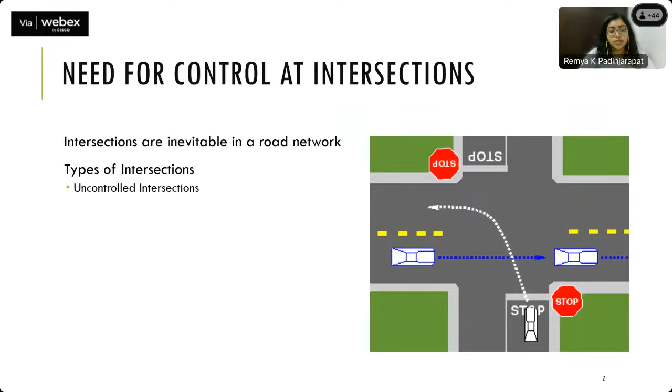The first is what we have intersections, and they are obviously an inevitable part of a road network. So there are various types of intersections: uncontrolled intersection, channelized intersections, rotaries, signalized intersection, and grade separated. Among them, signalized intersection is most popular in cities where there is a lot of city traffic and pedestrian traffic involved, because it works on the principle of time sharing, where different movements of traffic share the same space at different sections of time. So it's a very highly efficient system for city traffic.

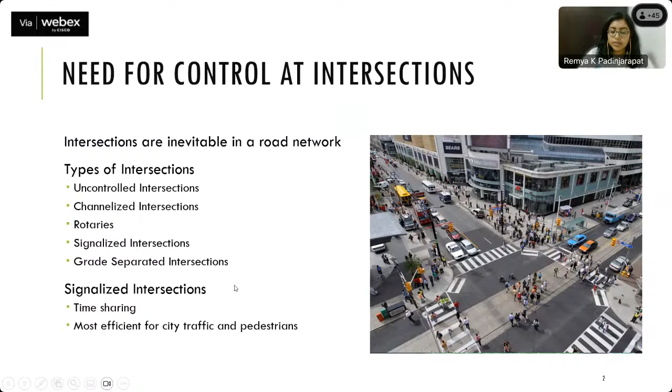So considering the traffic types, basically, you all will be very much aware, there are homogeneous as well as multi-class. Homogeneous is obviously similar types of vehicles, or the behavior of vehicles will be quite similar. They'll be lane following. But in multi-class traffic streams, there will be a lot more varieties of vehicles, because of which the behavior of vehicles is different, which results in a weak lane discipline. And specifically, these characteristics become very strong during queuing and queue discharge conditions, which is very much of importance when we are designing signalized intersections.

So again, coming to the basics, in an ideal condition, vehicles will align themselves in a very orderly manner, and during the green time, the discharge is seen such that there is a lag. Excuse me, I'll just change my pointer.

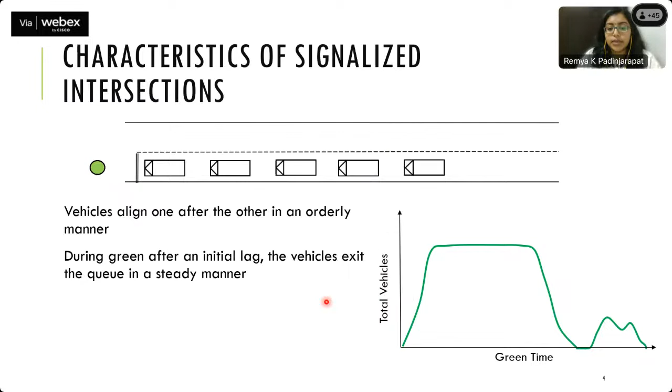Yes, so there will be a lag in the initial discharge, and once a point is reached where the vehicles will have a steady flow, and this is the maximum flow that is seen at the intersection, and it is called the saturation flow, which is of importance for us at this moment.

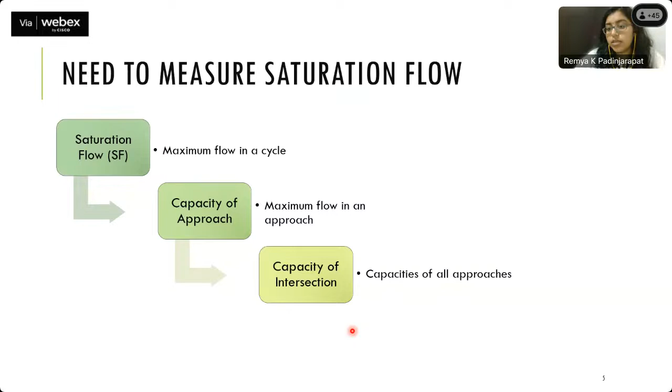So why do we need to measure saturation flow? It is the maximum flow in a cycle, which eventually translates to finding out the maximum flow that an approach can take in, and it is used again to find out the capacity of an intersection, which is the maximum flow among all the approaches, and again redistributed to find out the signal timings, which is proportionately divided based on the capacity of each approach.

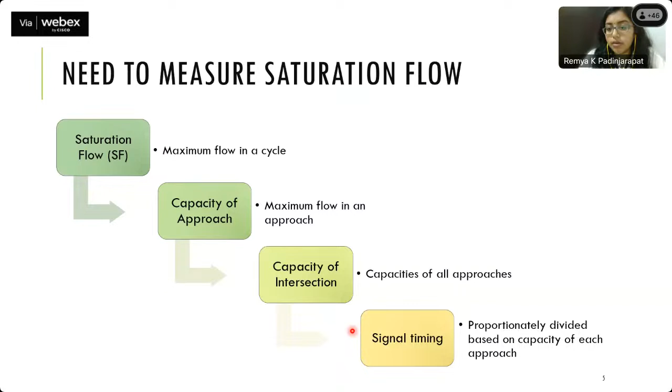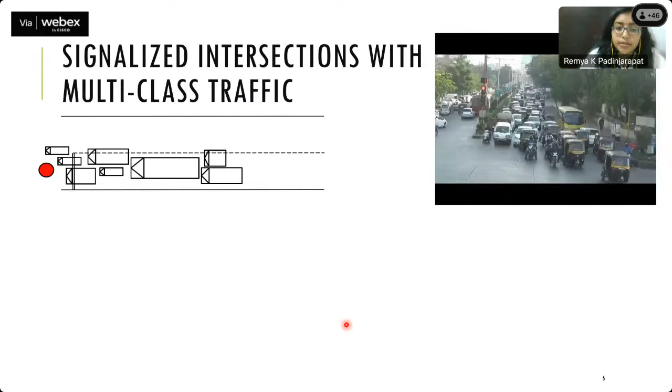But when it comes to multi-class traffic streams, this is a very vague representation of how queuing would generally take place in a multi-class stream, because the vehicles will tend to take up whatever gap is available and try to move ahead in the queue. So we observe a diamond-shaped queuing pattern here, and the vehicles tend to creep forward. Even though the queue might be standing, the vehicles might slowly move ahead, which is a phenomenon called headway compression.

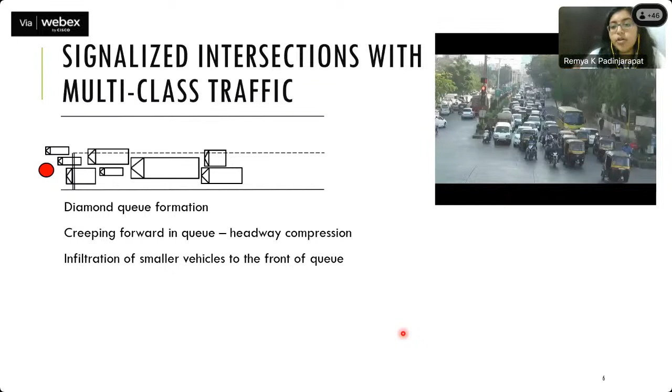And then of course there is the infiltration by smaller vehicles towards the front of the queue. The smaller vehicles just clog around in the front of the queue, and what we see during discharge is that there is no particular first in first out pattern. For example, you can see the two-wheelers here, they come from the extreme end and take their turns. Although they might not be the first vehicle in queue, they tend to leave the

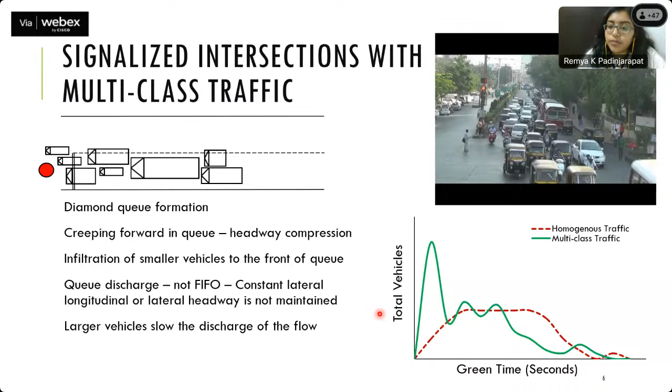queue earlier. So in short, these behaviors, and you can see that larger vehicles will always slow down the discharge of the other flows behind them. So because of which, instead of a steady pattern, what we observe is a very fluctuating discharge. So this is one of the problems that we are trying to address in this study.

So the question that remains is, where do we draw the line? Where do we draw the steady line, and how long does that go? Whether it starts at this time interval or the first interval, or does it start from here, and how far does it go? Does it stop at 10 seconds or 15 seconds or 20 seconds? So that is the question that we are trying to address here.

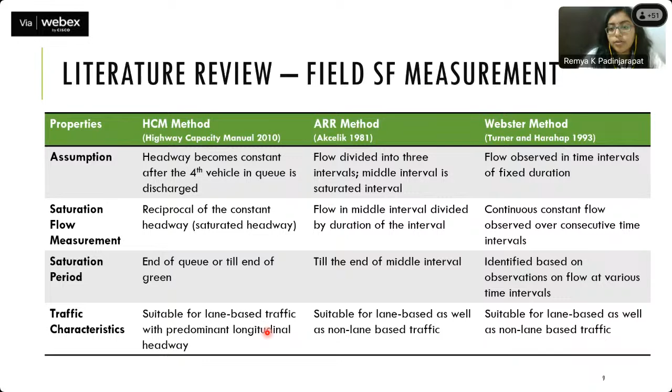As far as saturation flow estimation models are concerned, which is in the absence of flow data, more from a planning perspective, the general pattern is that there will be a base saturation flow model, and there will be adjustment factors. The base saturation flow model is usually the saturation flow that is seen in a base signalized intersection or base approach. So how do we define a base approach?

It's mostly described as without any disturbances from side friction due to parking, there is a proper pedestrian crosswalk, there is no bus stop. So there are these many factors, and there is the presence of an all-car condition and no other vehicle type. These are described as the base flow condition, and the adjustment factors will be the adjustment for each factor which is deviating from the base condition.

So base saturation flow for the Highway Capacity Manual uses the saturation headway, and it's a constant value for one lane. It is described as 1900 vehicles, and whatever changes from the base, of course there's a description of the base intersection in the Highway Capacity Manual, and whatever is deviating from that comes in as an adjustment factor.

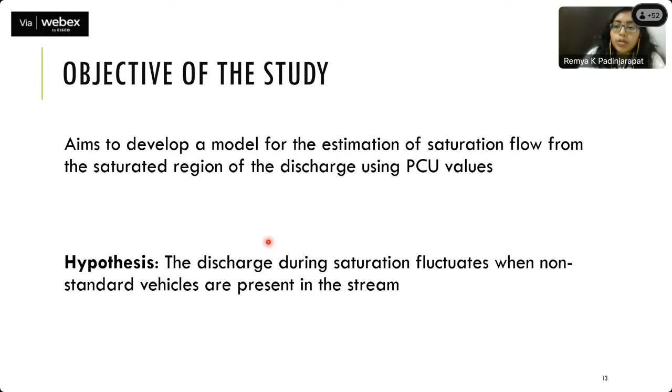So the fundamentals of the model are developed based on this hypothesis. Suppose on the x-axis is the green time, and the y-axis is the number of vehicles. We can see that the flow is fluctuating throughout the green time. So an expected saturation flow, shown in the red line, would be such that the PCU values bring the flow of vehicles towards this saturated flow line.

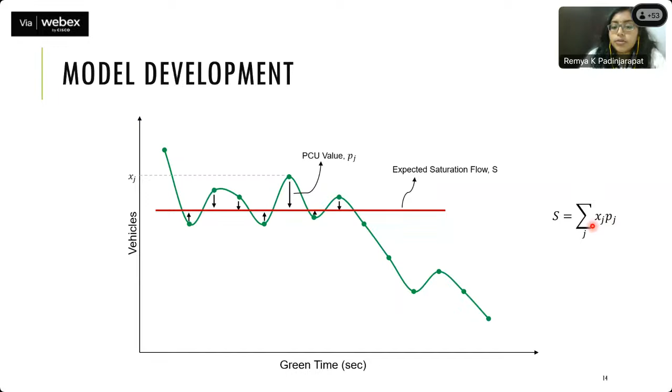So PCU should be able to describe the deviation of the flows from the mean saturation or the expected saturation flow value. And this we can sum based on the equation that saturation flow will be the sum product of PCUs and flow values in each interval. So our model starts here.

If we have a regression form of the equation, it would look like this, where S is equal to sigma over j of xj times pj plus epsilon, where epsilon is the residual error term, x is the flow value for the particular vehicle class j, and p is the PCU value of the vehicle class. So basically, the idea is to find the PCU values which best fit the flow values to describe a saturation flow.

Now, rewriting this equation, with the error term on one side and the other terms on the other side, we can rearrange the equation as such. And we square the summation of this equation over various intervals. So far we have been talking about PCU values for a single flow or cycle. Now we have multiple intervals over which we have data, so the sum of all the intervals should also give the same saturation flow value.

In that term, we are summing the epsilon, the RHS and the LHS, and squaring them for better accuracy, so that we end up with the sum of squared errors. The idea is to minimize the sum of squared errors with an optimization model, where z is equal to the summation of the error term shown within the brackets, which is the difference between the expected saturation flow and the sum product of flows and PCU values.

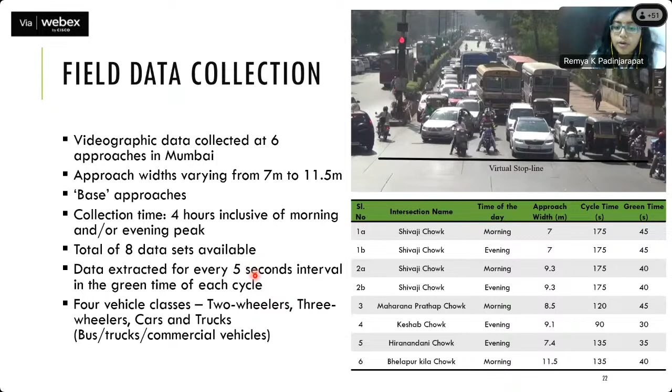So at the end we have classified flow data in each 5-second interval for each cycle along all these intersections. So that was quite data intensive. Coming to what the discharge profile would look like, we can see here that there is an initial peak. In the first 5-second interval there is a peak in discharge, possibly due to the infiltration of 2-wheelers and them accumulating in the front of the queue. After that, there is a decrease, and this continues for some time till the whole queue dissipates.

So we come back to our question. Where does the saturation flow start? What is the value, and how long does the saturated region last? Here, the first interval is the initial surge. We can see a surge in the initial discharge, as opposed to a gradual increase, which is seen in ideal conditions. Although there is a surge, this is not the steady flow that is present throughout the discharge, and hence this flow cannot be taken into account for estimation of saturation flow by definition itself.

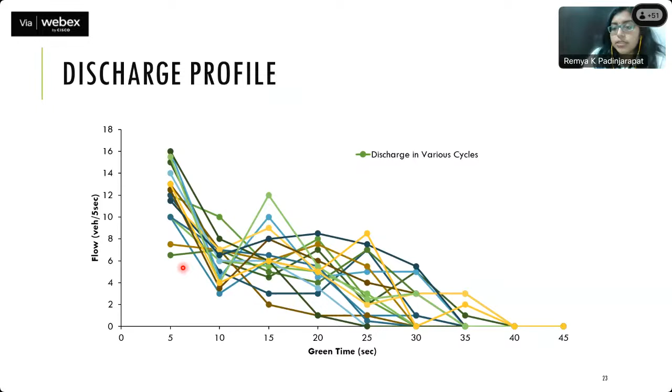So we will not be including this part, and we'll assume the 10-second interval to be saturated and start from that point. Now, coming to the initial surge, we dived in a little deeper to find out what might be the cause, or ascertain the idea that we had of 2-wheelers being the main vehicles that discharge during the first interval.

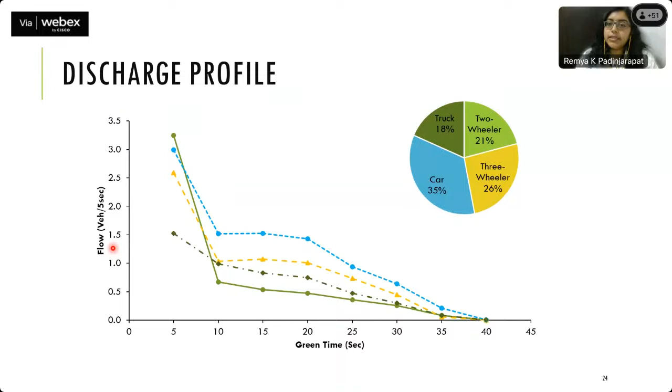So although this value is not taken into consideration for saturation flow estimation, it is quite important to be incorporated into the capacity, or as an adjustment factor also, which is done in the Indo-HCM.

So, as discussed, the saturation flow period needs to be ascertained. How long? Because the data that we need for our model is the data from the saturated region. So although we have eliminated data from the first interval, we'll start with the second interval, and we will start by assuming that the flow in the second interval is indeed saturated.

So from there, what is done is every interval is statistically compared with the data from the 10-second interval, and however long the data is seen to be comparable, the saturated region is assumed to continue till that period. I can show that with an example.

For example, here there's a first interval we are not considering. The second interval is assumed to be saturated. This can also be seen in other literature as well, where the ARR method and Webster's method suggest an approximate 10 seconds after which the saturated region starts. So we are in line with the other studies. Now, which of these intervals is saturated and for how long it might go on.

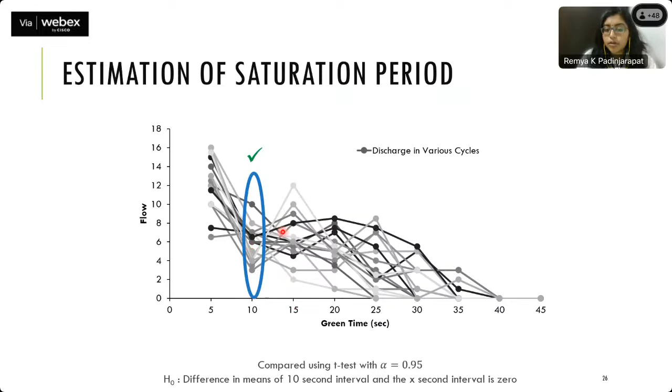So we take the data from each interval and compare it using a t-test, in this case with an alpha of 0.95. And the hypothesis would be that the difference in means between the 10-second interval and that of the interval under consideration is 0. So when the test is a success, we will consider that region to be saturated.

So for instance, here data from the 10-second interval is compared with the data from the 15-second interval, and if they are statistically similar, then we assume the 15th second interval to be saturated. Similarly for the 20th second, but if, for instance, the 25th second is not found to be statistically similar, then we stop right there, and in this case the saturation period would be from 10 seconds to 20 seconds, which is a 10-second duration in whole. So the data from these intervals alone will be taken in for the study.

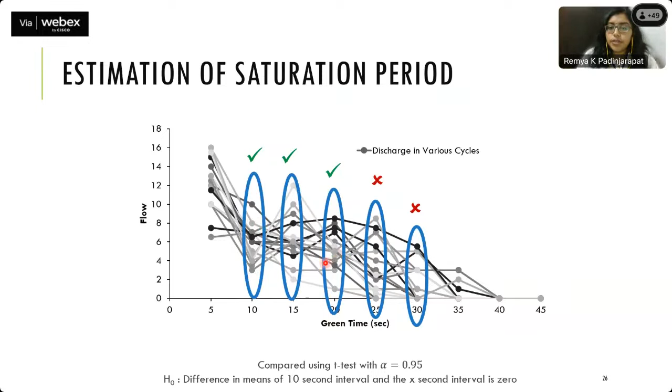Now the input into the optimization. So far we have got the data from the saturated period, which will be the input into the optimization model. So we had the field data, we have every 5-second interval, and we statistically estimated the saturated region. From there, we move on to the convexity test, where the determinant of the Hessian must be greater than 0. So for each data set, we will find out what the Hessian is and ensure that it's greater than 0, so that we can use it for further analysis.

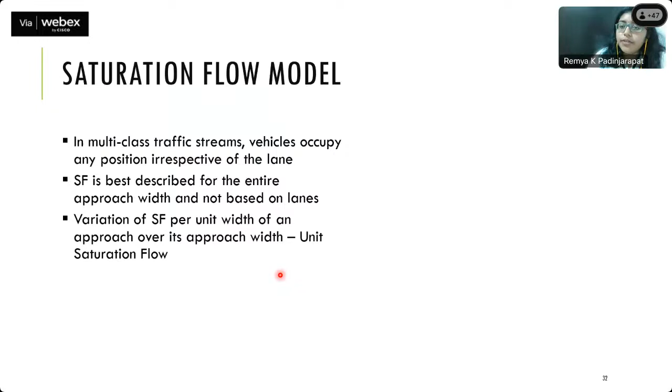Now, what this unit saturation flow shows is something we might have experienced while driving: in approaches with smaller widths, the vehicles are packed more densely than in approaches with larger widths. So the dense packing, or even during discharge, the aggressive behavior of discharge is higher for approaches with lower widths compared to higher widths. So that element of non-lane based traffic discharge is coming into picture using unit saturation flow.

And thereby from unit saturation flow, we are arriving at the equation for saturation flow, which is unit saturation flow times the width, and with A and B, the calibration constants, and the data that we obtained from our results, we can develop a saturation flow model as shown here, which is a second degree model indicating that saturation flow has a non-linear relationship with width.

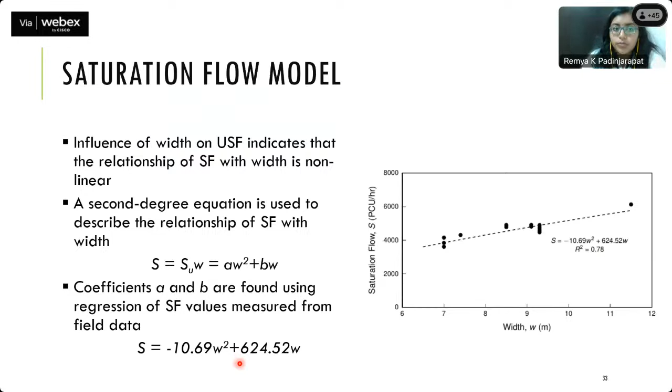Now coming to the inference from the study, the hypothesis that PCU can define the unevenness of flow can be confirmed with this study, and the model that we developed based on this hypothesis yields consistent results across all locations, and we can see that it is efficiently able to capture the vehicular interaction.

The PCU values that result from the model are seen to have a logical consistency with the size and maneuverability of the vehicles that we see on the road. And PCU values are seen to depend overall on the stream composition rather than the individual composition. And again, unit saturation flow value is able to describe the discharging behavior in non-lane based multi-class traffic streams.

So the study provides a novel saturation flow estimation or measurement model using field data, and the model is generic in the sense that it can accommodate more vehicle types. Although we have studied only 4, we can have more vehicle types, or we can even reduce the number of vehicle types. Additionally, it can be used to measure saturation flow in different conditions. We have only studied base here, but it is suitable for flow measurement in every other condition, weather conditions.

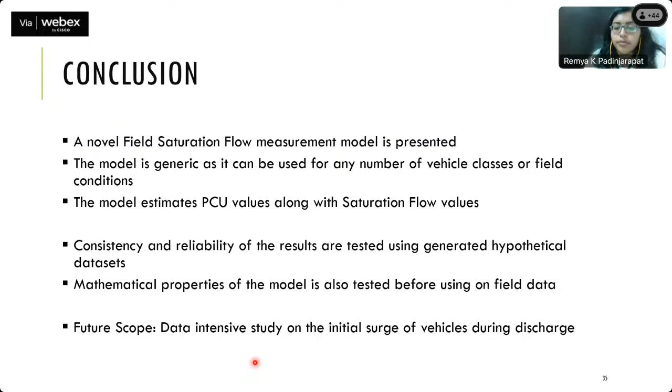So along with the saturation flow, we also get the PCU values that influence the behavior at signalized intersections. Now the results are seen to be consistent and reliable, and they are tested using hypothetical data sets, and the mathematical properties are also ascertained before we use field data. So as for future scope of the study, the initial surge of vehicles in discharge needs extensive study, and their effect on arrival rates, arrival patterns, all these factors are a promising direction of research.

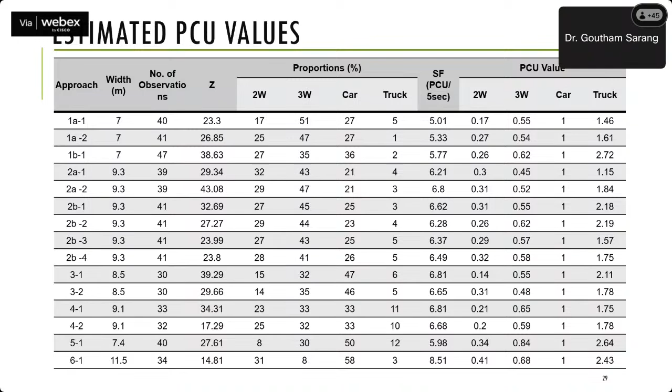Hello? Hello? I'm sorry, I'm not able to hear anything after three-wheelers. Praveen, sound is not coming from your side. Can you hear me now? Yeah. Okay, so I actually lost after three-wheelers. So you were saying that three-wheelers do not double the difference.

Yeah, I was asking, for two-wheelers the variation was almost twice, and for trucks also, but that variation was not observed for the three-wheeler. What could be the reason, or is there anything significant for that particular vehicle type? Okay, so the main reason the variation of truck is too high is because we have considered multiple vehicle types, the LCV, buses, trucks, everything into one picture. Although when you say double, the number is quite significant in itself.

So for two-wheelers again, I think the way we look at it should be a little different than saying it is double the particular number. It would be more to see that the variation between the numbers is quite small, indicating that we have better results from the PCU values or from the model.

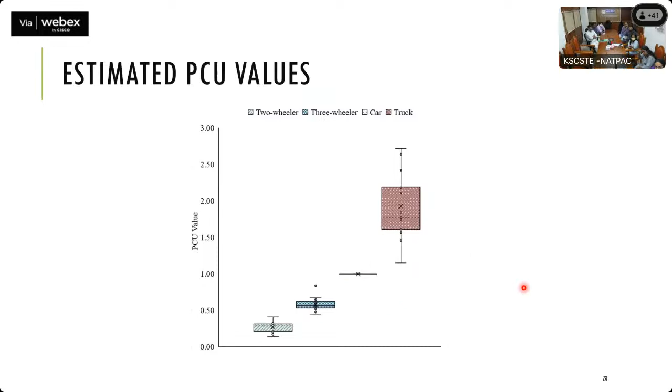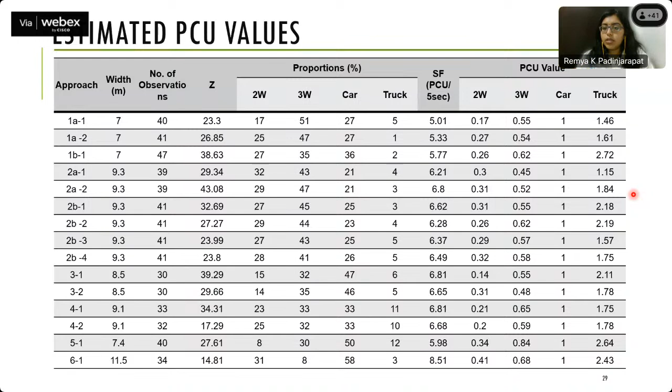Okay, but even then, the three-wheeler is the only thing which stands apart, right? Yeah, you can say that. One more thing I must say, I have not thought in that direction. We were mainly looking for the influence of one vehicle over the other, and based on the mean and standard deviation values, the value seems to be within the expected range or within the deviation.

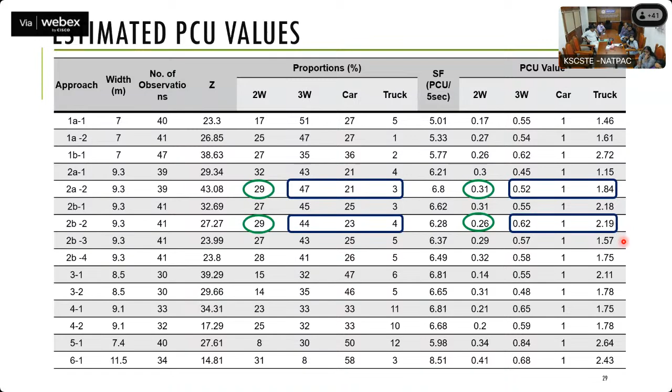Okay. Just one more question. In case of the unit saturation flow, the saturation flow was computed per meter width, right? Yeah, per meter width. Was the time factor, like per second, considered? Because to take in the aggressiveness, normally with higher width, the per second rate will be much higher, right?

When compared to the lower width roads. Because actually I could see that in the inference part, like aggressiveness, I think it was somewhere told that in case of lower width roads, the driver seemed to be more aggressive than on the higher width road. So I was just skeptical. Okay, aggressive in the sense that the gaps might be lesser, they might drive very close to the vehicle ahead of them in case of smaller roads than in case of wider roads.

So what we mean to say is reflecting the denseness, or how many vehicles are occupied in 1 meter width of a road during discharge, is different for a lower width road than for a higher width road. So in roads with lower widths, there will be more vehicles tending to be accommodated in 1 meter than in roads with higher width, where a little bit lesser number of vehicles will be there in 1 meter unit of the road. Yeah, that's obvious.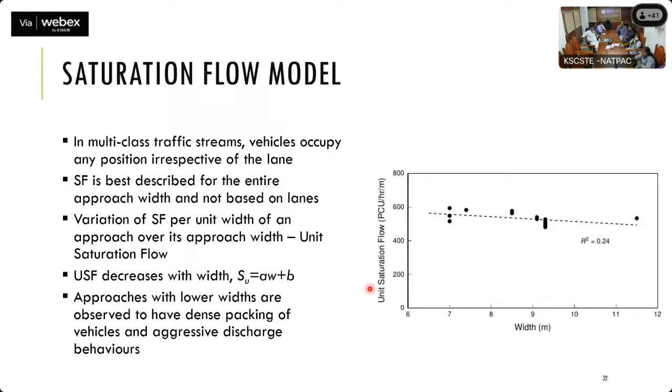But what I was looking at was, if you take the time factor into consideration, like per second flow for each width, is there any chance that they might be similar? Because if you take per second flow, that could be somewhere. No, I was just inquiring. Okay. So if you want to really know.

So we can see here the values in PCU per 5 seconds, and if we compare that across different widths. Excuse me, I'll move the. Okay, so this is PCU per 5 seconds for each width. So you can see here, again, there is definitely a difference in the PCU values. And if we go by per meter again, it will eventually even reduce. Okay, fine. Thank you.

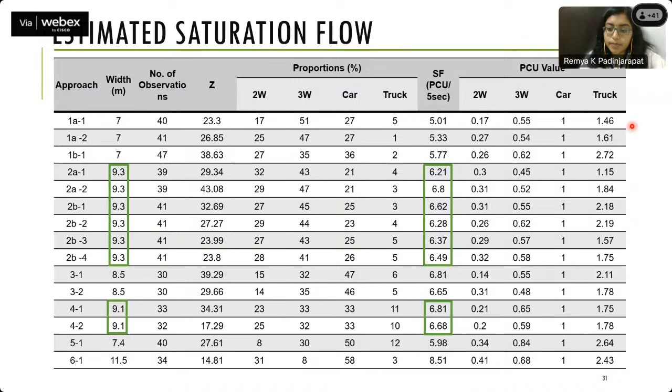Ma'am, there's a question from Mithun. How are the estimated PCU values from this research different or similar to the outcomes of similar Indian research in this area? Also, was the effect of initial surge of traffic from the approaches considered in this analysis?

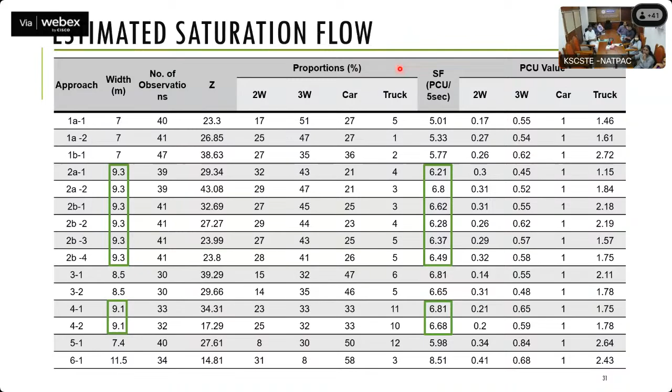Okay, so I'll get the first question first. Can you please repeat that? It is there in the chat box. Okay, okay. You want us to again repeat? No, it's okay. I'll take a look.

Now coming to the effect of initial surge, yes, initial surge is not used here because we are focusing on the analysis of saturation flow during the saturated interval, and initial surge is not a part of the saturated interval because it is a one-off condition. Saturated region, by definition, is the prolonged existence of a high flow or the maximum flow. So since initial surge is only the initial part, it does not prolong through the discharge. We cannot take it into estimation of saturation flow.